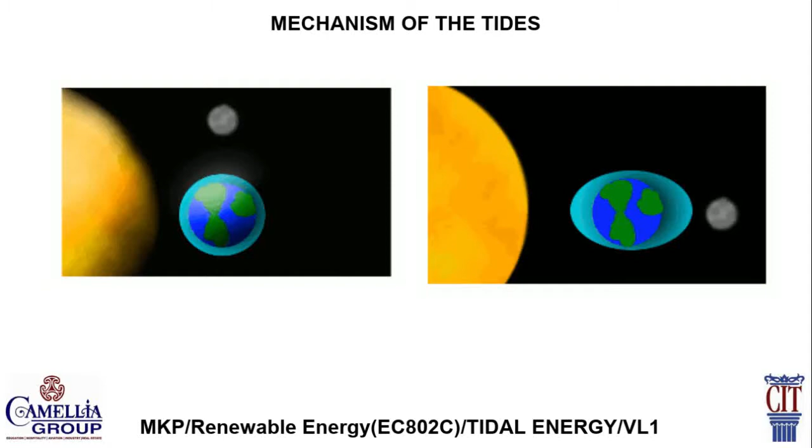Since the distance between the moon and the earth is much closer than between the sun and earth, the gravitational effect of the moon is much more significant than that of the sun on earth, despite their tremendous contrast in mass. In most cases, the moon is the dominant factor in tides. Therefore, there are generally two high tides and two low tides per day due to the rotation of the earth.

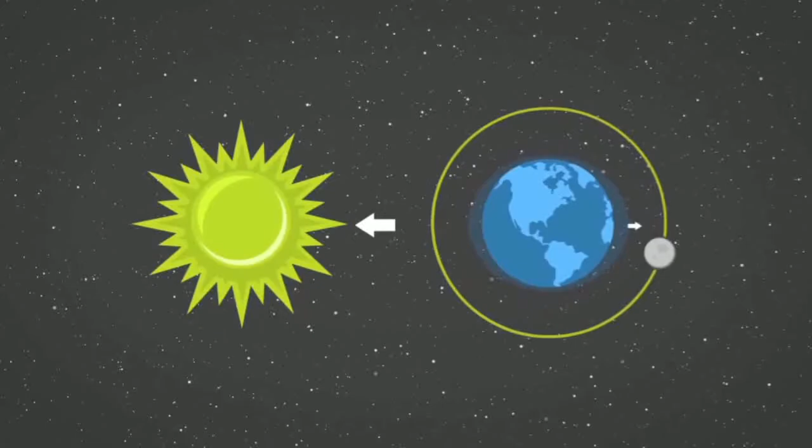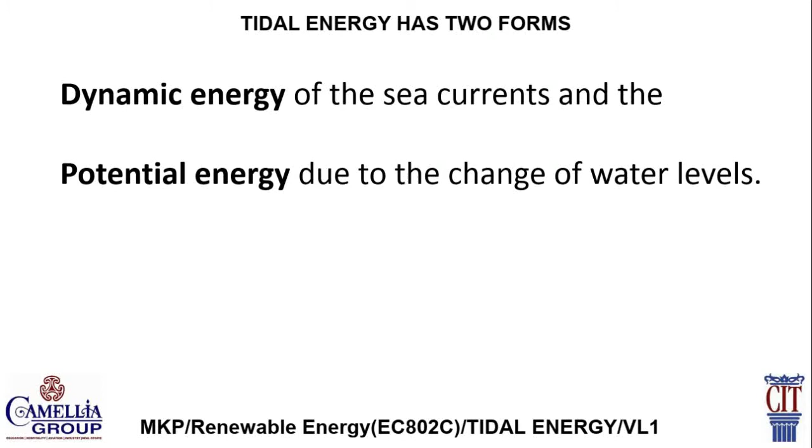Tidal energy has two forms: the dynamic energy of the sea currents and the potential energy due to the change of water levels. The dynamic energy can be made use of by turbines in the tidal stream system analogous to wind turbines. Due to the high density of water compared to air, the density of dynamic energy of water flow is much higher than air flow. Therefore, the tidal turbine is usually smaller than a wind turbine and can work at a lower flow velocity.

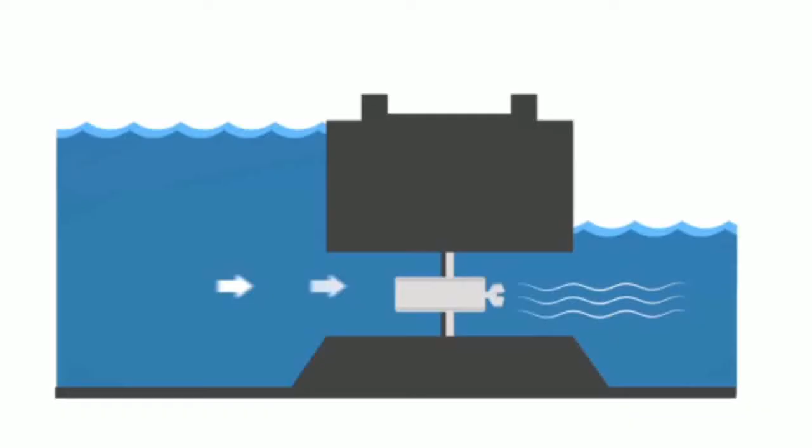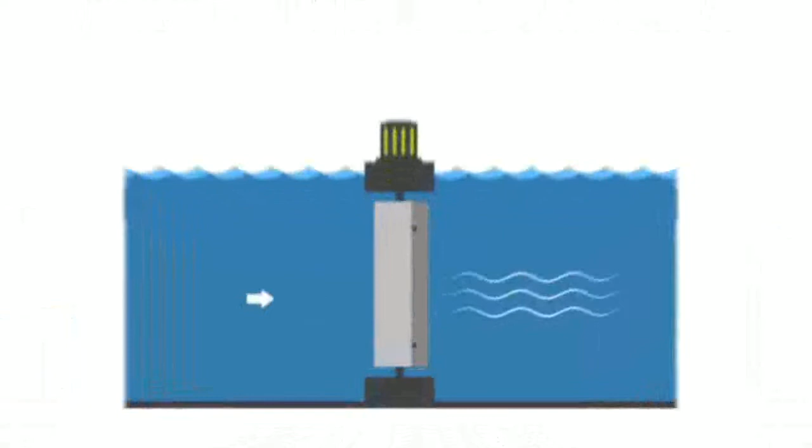Like wind turbines, tidal turbines can be divided into two major types. The first one is axial turbines. They have rotary blades with the axis parallel to the flow direction. The second type is termed cross turbines. The axis of the turbine is usually vertical and the turbine can be driven by horizontal flow in all directions.

Now one question arises: are these tidal technologies economically competitive? Tidal energy technologies have advanced considerably over the past few years, and there are a number of ongoing full-scale demonstration projects. Horizontal and vertical axis turbines currently use blades that are positioned either in parallel, that is horizontal, or perpendicular, that is vertical, to the direction of flow of water.

The turbines are similar to designs used for wind turbines, but due to the higher density of water, the blades are smaller and turn more slowly than wind turbines. Furthermore, they have to withstand greater forces and moments than wind turbines.

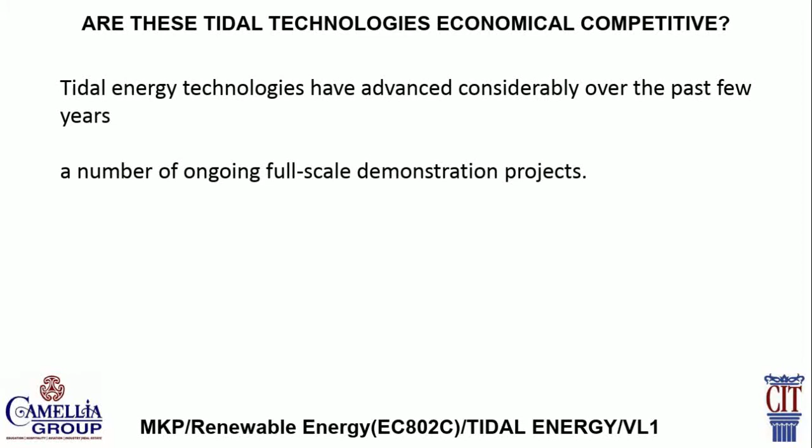Tidal range technology has a number of options for power generation. Firstly, one-way power generation at ebb tide. A reservoir is filled at flood tide through sluice gates or valves that are closed once the tide has reached its highest level. At ebb tide, the water in the reservoir is released through the turbines and power is generated. With this single cycle, power is generated for only 4 hours per day.

The second method is one-way power generation at flood tide. At flood tide, the sluice gates are kept closed to isolate the reservoir while at its lowest level. When the tide is high, the water from the sea flows to the reservoir via the turbines, thus generating power. The disadvantage of this cycle is that it has less capacity and generates less electricity, and it may be ecologically disadvantageous as the water level in the impoundment is kept at a low level for a long time.

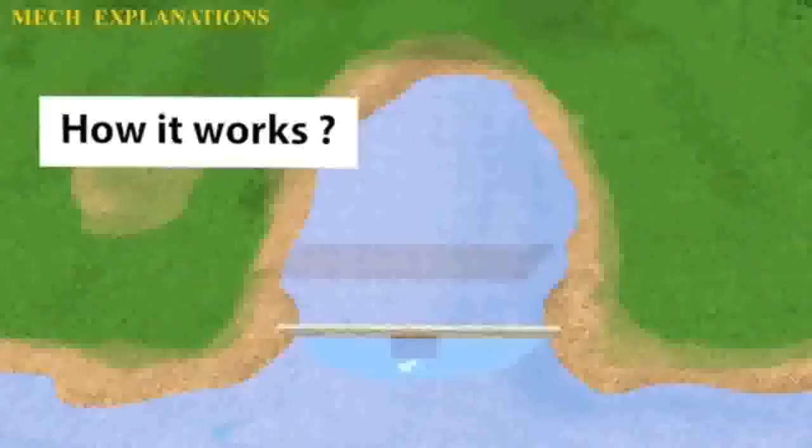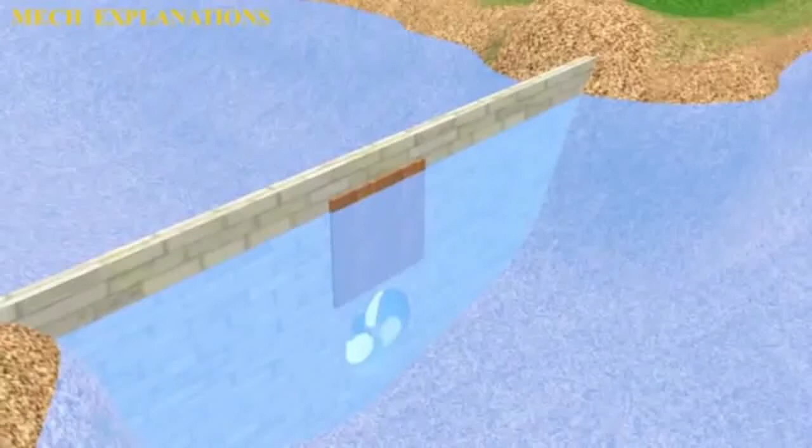The third method is two-way power generation. Both incoming and outgoing tides generate power through the turbines. This cycle generates power for 4 hours twice daily. However, reversible turbines are required.

Tidal lagoons are similar to tidal barrages, except that they are not necessarily connected to the shore, but could sit within the ocean. Environmental impact assessments of a proposed tidal lagoon in Swansea Bay suggest that lagoons would have lower environmental impact than tidal barrages. A new type is the ultra-low head tidal technique.

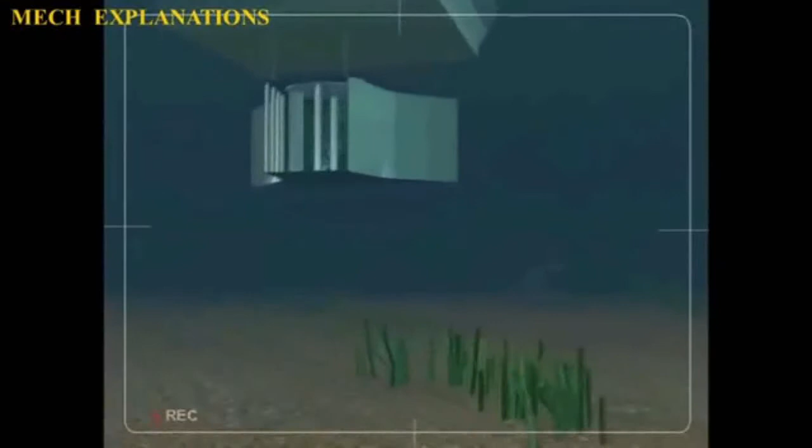This is a new application under development which is focused on harvesting energy from low head tidal differences of less than 2 meters. The use of tidal fences would consist of a number of individual vertical axis turbines that are connected to each other within a fence structure. The fence itself could be placed between the mainland and a nearby island or between two islands. These applications are in their early stages of development and there are no prototypes being tested in water at present.

Hybrid forms of tidal energy can be found in the form of multi-purpose platforms where both tidal current and tidal range technologies are used for electricity generation. These platforms are in an early development and innovative stage.

Another technical aspect for tidal current technologies is their deployment in the form of farms or arrays. Individual generator units are limited in capacity. Therefore, multi-row arrays of tidal turbines need to be built to capture the full potential of tidal currents. However, turbines have an impact on the current flows.

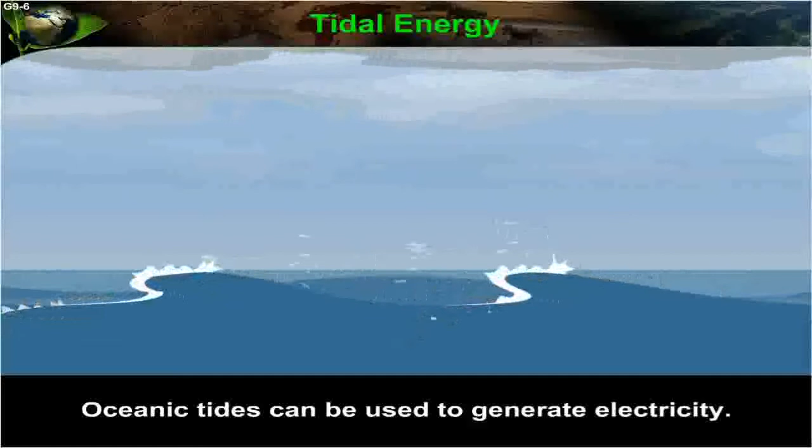So, the configuration in which they are placed is a critical factor to determine their potential yield and output. Tidal current technologies can also be used to generate electricity from ocean currents.

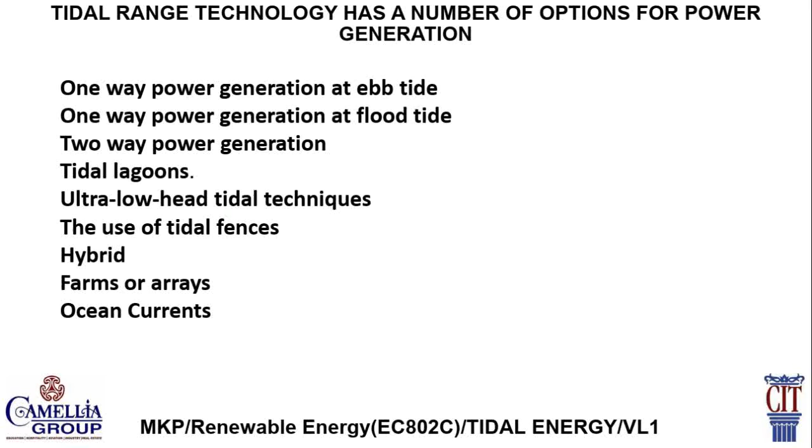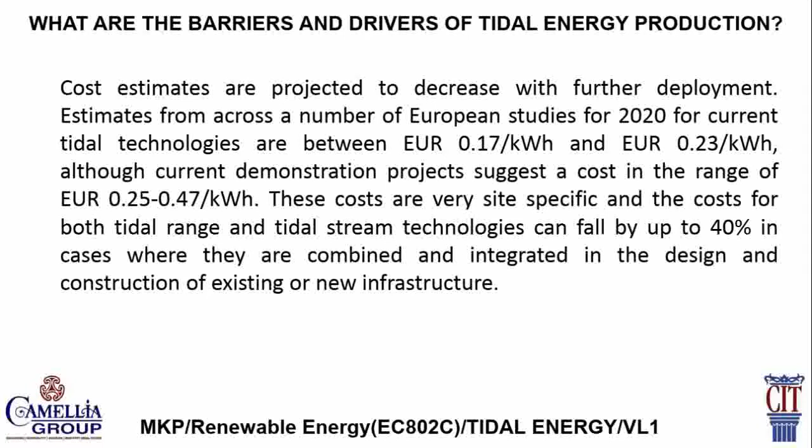Ocean currents, although slow, are a continuous flow that can provide a steady production that is not driven by the tidal cycles. Although there are currently no ongoing projects, studies have been widely undertaken. While discussing the economic viability of tidal power projects, we must understand what the barriers of such projects are.

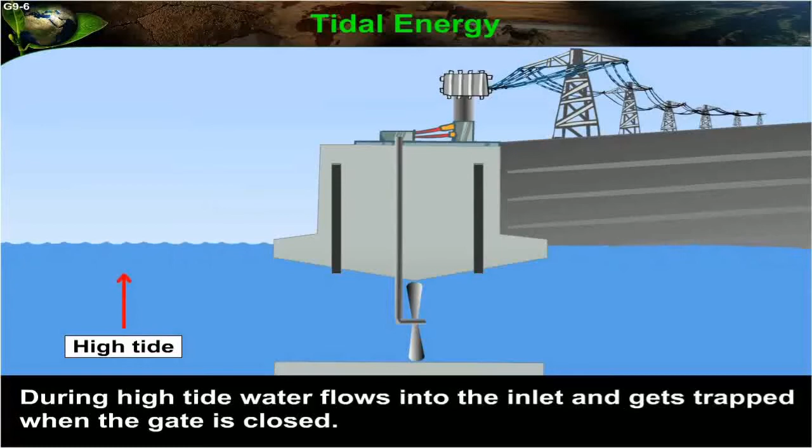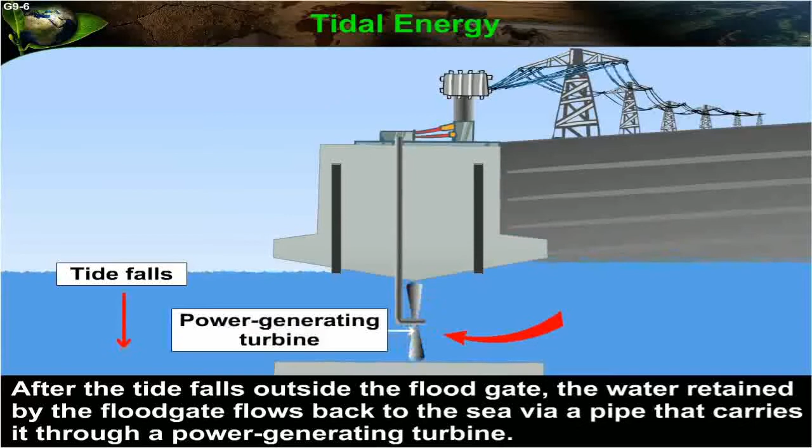Cost estimates are projected to decrease with further deployment. Estimates from across a number of European studies for 2020 have been studied. The costs are very site specific, and the costs for both tidal range and tidal stream technologies can fall by up to 40% in cases where they are combined and integrated in the design and construction of existing or new infrastructure.

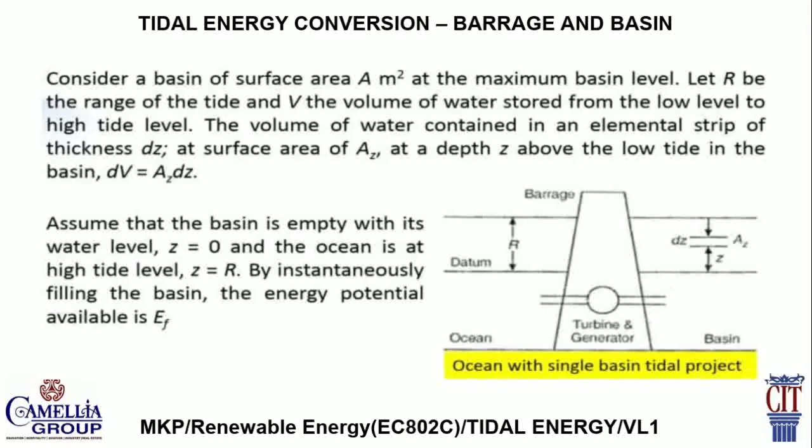If we consider that the density of seawater is rho, then the mass of that incremental volume is rho A dz. Now the potential energy possessed by that incremental volume of water is rho A dz into g into z. So the energy possessed by the water stored in the basin is E = rho g, integral from z equal to 0 to R, of z A dz, or we get A rho g R squared by 2. The calculation is self-explanatory. Here R is the range of tide.

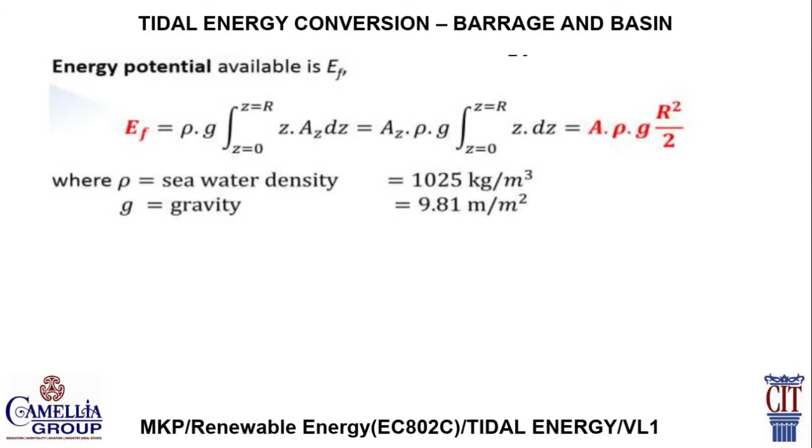Now let us understand the important components of a tidal plant. The first one is the barrage, which is required to form a basin. The barrage should be constructed with material available at the site or from a nearby place. Barrages for tidal power projects have to withstand the force of sea waves. So the design should be suitable to site conditions and to the economic aspect of development. Rockfill dams or barrages are preferred due to their stability against flows. The barrage crest and slopes should be armored for protection against waves.

The second one is sluice gates in the barrage for flow of water from sea to basin and vice versa. Tidal power plants operate on a continuously varying difference in level, at which the basin must be filled from the sea or emptied to the sea, as required by the operating regime of the power plant. And the third one is a powerhouse equipped with turbines.

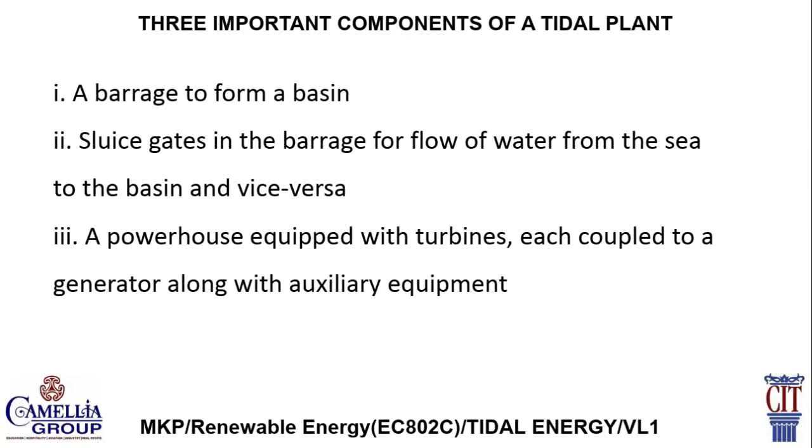The energy potential in tidal power development is exploited from low to very low heads, for which large size turbines are required. If the water head is more than 8 meters, a propeller type turbine is quite suitable because the angle of blades can be changed to obtain maximum efficiency while the water is falling.

Now let's discuss different advantages of tidal energy power plants. Firstly, there are multiple functions. These types of dams by necessity tend to be very long, even 30 to 60 kilometers, which is significantly longer than current coastal structures. However, a long dam can function with multiple purposes such as land reclamation, connections between the islands and mainland, coastal protection, and deep sea and liquefied natural gas ports. The initial investment costs could easily be shared between these different industries, thus helping to lower the cost per kilowatt hour and create higher return on investment.

Tidal power is predictable. The moon is not going anywhere anytime soon, which means that this type of tidal power will be found indefinitely. Furthermore, the tidal cycle is predictable and repetitive, which allows us to know exactly when and how much power is obtainable. Available tidal power is firm as there are no wet or dry years, no dry or wet months, no influence of summer or winter on the availability of tidal energy.

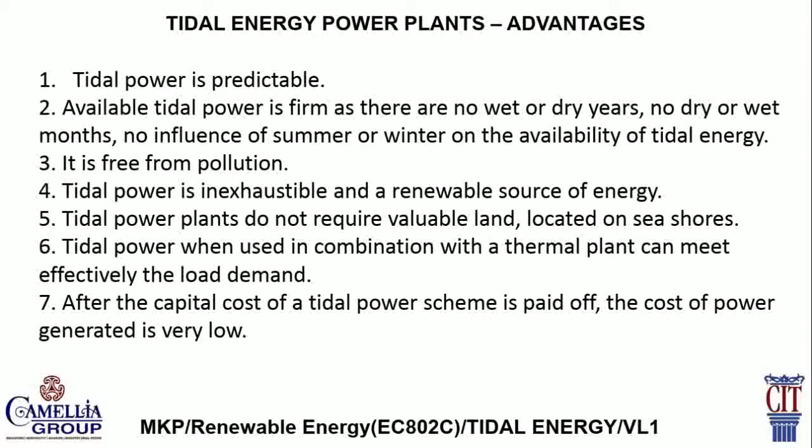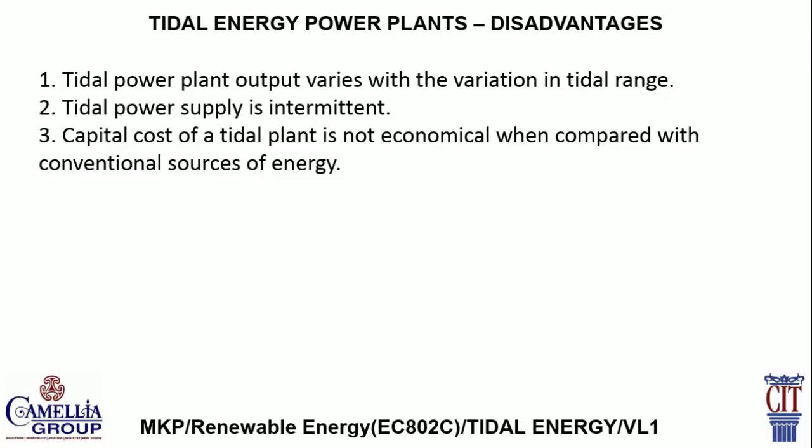Though there are so many advantages, there are some disadvantages also. Firstly, the tidal power plant output varies with the variation of tidal range. Secondly, tidal power supply is intermittent. You cannot get power throughout the day. The capital cost of a tidal power plant is not economical when compared with conventional sources of energy. So, this is all for today.